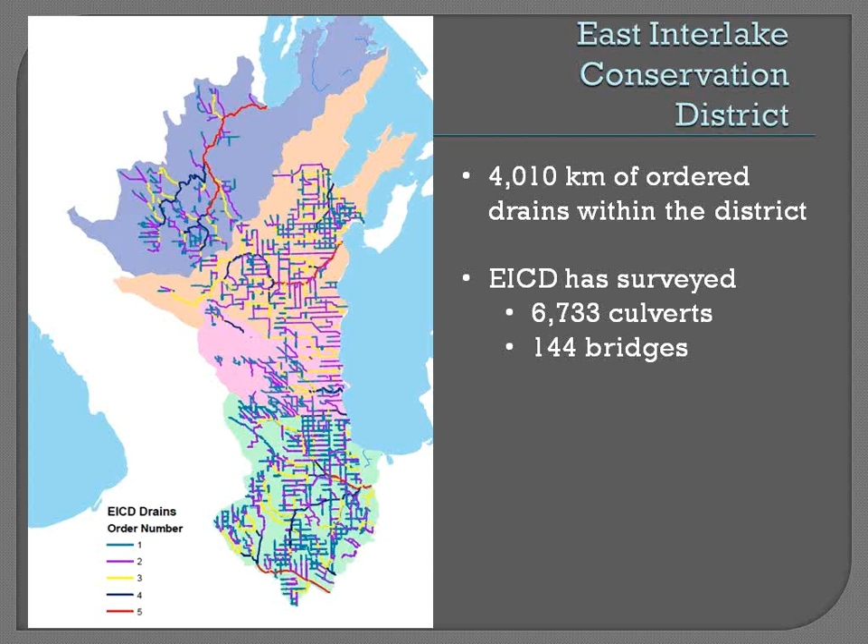...or other aspects that the integrated watershed management plan has designated. And then, luckily, in the East Interlake Conservation District, we have LiDAR for the Fisher River and Icelandic River watersheds. So hopefully it will become a little bit simpler for us - or will it? When we look at it, we could do something like a LiDAR-produced drain delineation.

So this is delineated drains within the watershed alone, and now it counts in all the drainage on private land, maybe some drains that aren't on the order 1 through 5 - that's 4,000 kilometers of drainage alone in one watershed. So what was the whole interlake is now just one little area.

So the question comes at the board level: what will this other layer of drainage mean to watershed management, right? So we have this layer - can we include it on a detailed map like this? Like, the drainage maps of tile drainage - can we include that in a map, something like this, so we know where they are at least?

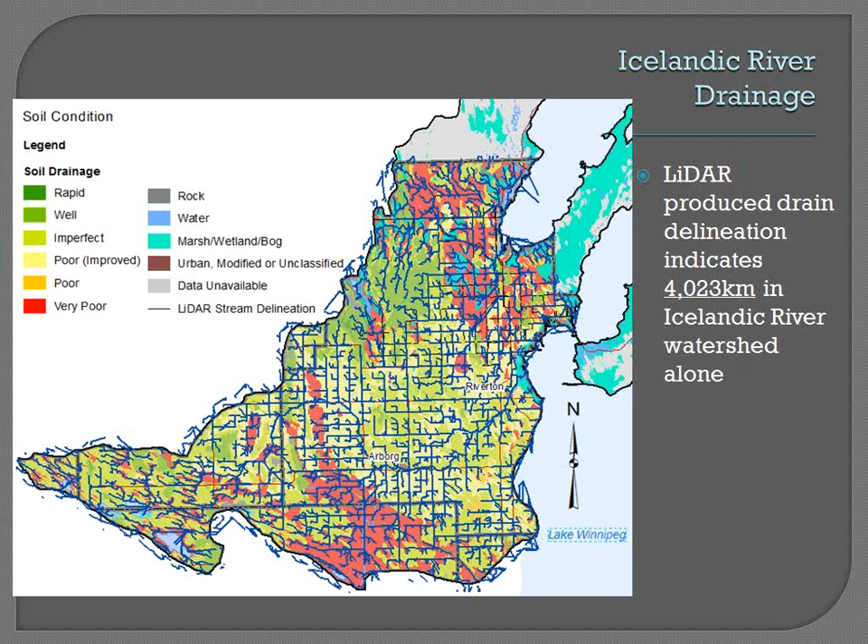Well, it may look like there's a lot of drainage, but when we run another process on the LiDAR data set, it indicates that about 12% of the Icelandic River watershed is not contributing on normal events - the rain fills up and doesn't find anywhere to go. So the yellow areas are the non-contributing catchment areas, and the blue areas are potential wetlands. The board indicates these are areas where we'd like to see just monitored drainage or reduced drainage, or just understand where it goes, relating to tile drainage especially.

It's amazing what the LiDAR can do for you. As a conservation district, you're able to show that 12% of that area is not contributing. If you had to send out your surveyors and do all that work, it would have taken a long time. Yeah, it saves a lot of time, especially on...

If an individual landowner comes to us and asks about conservation programming, we can know and do a lot on the tabletop now, and decide if that project would be feasible - whether it's a wetland retention or other habitat easement areas. So it's the first thing we go to now, the LiDAR data set. Probably one of the most important tools in the toolbox for a conservation district. It definitely is.

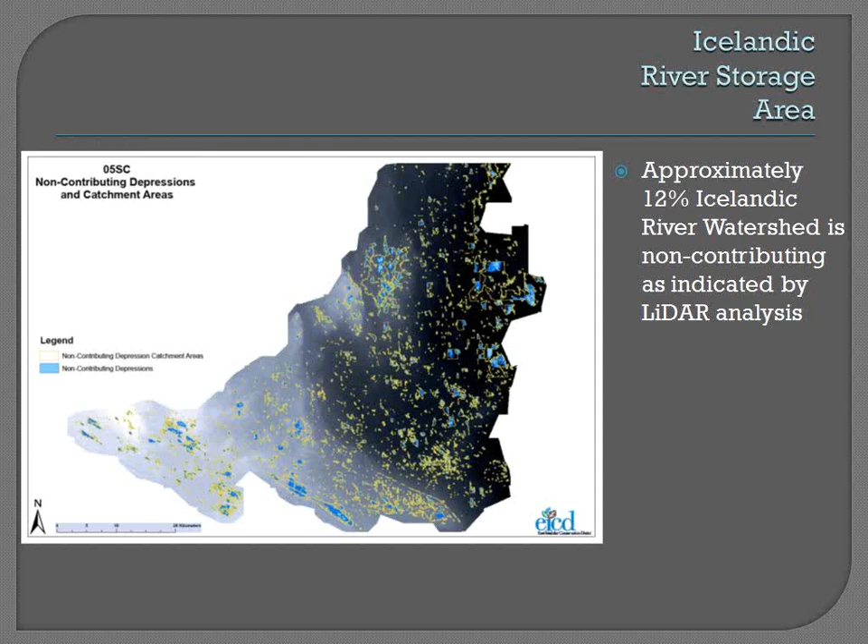So in the EICD, one of the first questions 10 years ago was, what is our water quality like? So we initiated 9 different sampling stations within the East Interlake Conservation District, and we've been monitoring them 4 times a year. This is a general water quality index for the 9 waterways based on 22 different parameters. We took the liberty of putting the ones with the best general water quality indices on the left.

Fish Lake, Willow Creek, Washow Bay - not too much anthropological activity there. The headwaters are wetlands, and it goes through undulating creeks, maybe through some pasture area, and then empties into Lake Winnipeg. But on the right-hand side, you can see where there's a lot of anthropological activity: Grassmere, Parks, Icelandic. Those are the areas where there's the Centerport development, lots of urban areas like Parks and Grassmere. Icelandic River is more agricultural area with some urban areas. So you can see the general trends here.

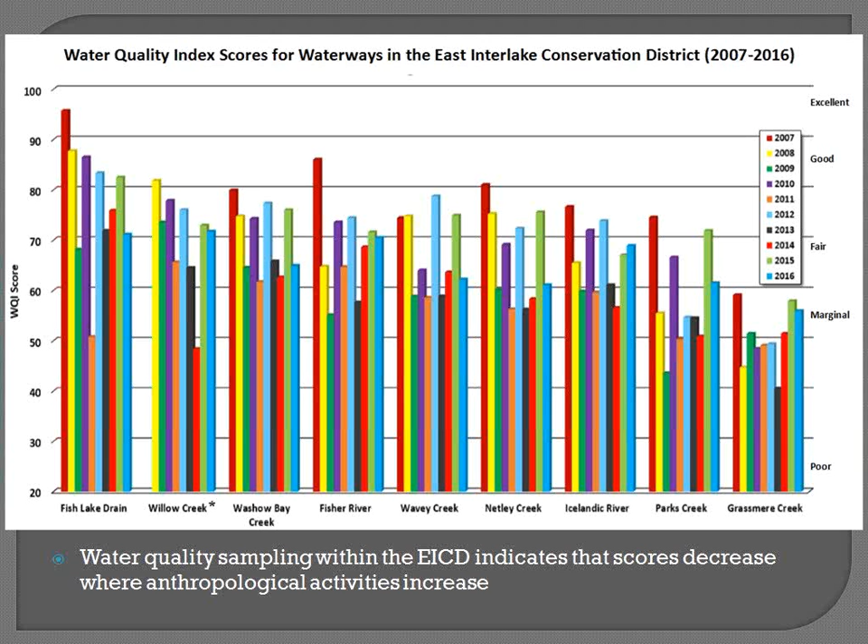I mentioned earlier that we've completed 4 integrated watershed management plans, but as you know, sustainability is a moving target, so every once in a while the sub-districts come back together and discuss other strategic topics that might not be within our integrated watershed management plan. The point here is that we thought about 6 different things at these meetings.

The number one question that the members of the Conservation District had was, how should EICD, municipalities, and planning districts - the reason the 3 is there is because a lot of our board members wear those 3 hats, so it's easy for them to bring those 3 organizations together - how should these areas stay abreast of tile drainage and any associated positive and negative effects? So number 1 was partnership, number 2 was partnership, number 3 was partnership.

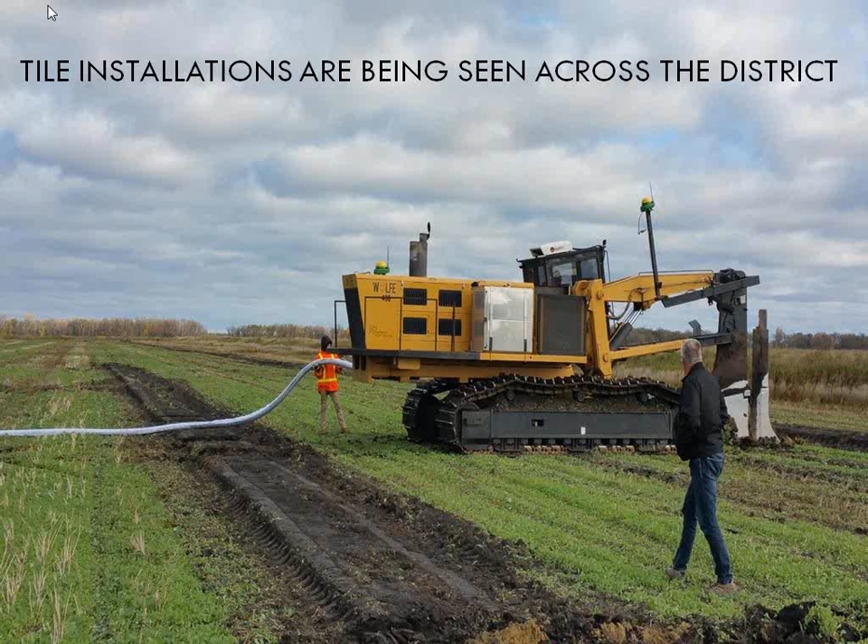So, there we go. Tile has been brought into our district over the last 10 years or so, and it's ever increasing. Projects vary in size from whole fields to just small areas. I'd say a lot of our projects are that 20 to 40 to 60 acres where there's a wet spot and the natural drainage and the soils aren't doing it. So the tiles are put in sort of selective areas.

So this picture, and the last one, is courtesy of MAMA - that's the mnemonic for the Manitoba Agricultural Water Management Association. That's a mouthful, but they're an organization that represents industry and has been very active at promoting this technology and showing people what it's all about. So the picture on the left is interesting, I think, because you see a lift station and an irrigation pipe. Obviously this is in potato country, a little bit sandier soils. Lift stations are required where the natural topography doesn't do the job, so that's probably the case in about half of the projects.

And the picture on the right, you can see a tile lift station outlet into a sort of private ditch, and then it's heading north and then towards a municipal ditch. And that kind of generates a question: should there be public investment in helping this technology work, or is this strictly a private venture? That's probably a question for another webinar. But in Ontario, you see a lot of their infrastructure is geared to basically tiling all agricultural areas.

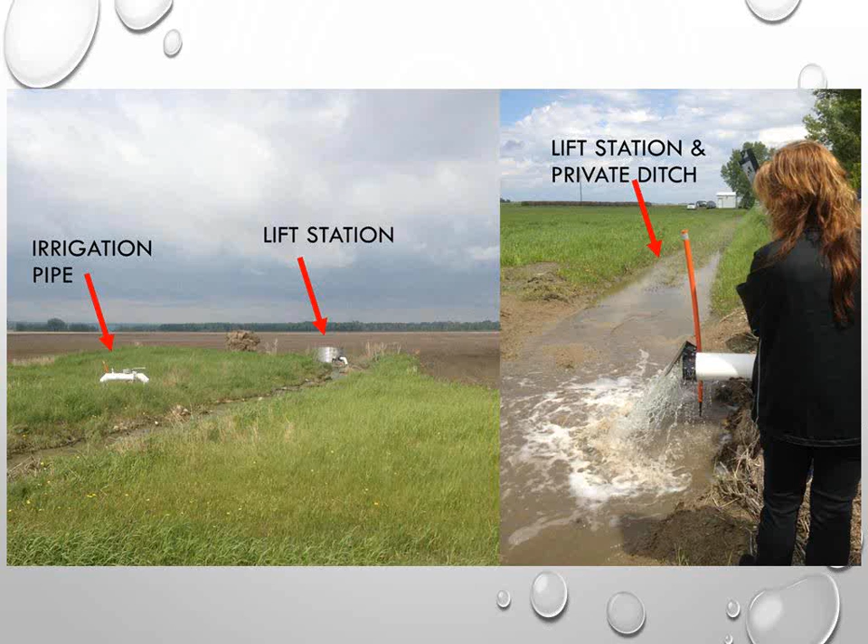Yes, and perhaps that's not surprising, Cliff, considering how tile is the dominant form of drainage in that region, whereas here, historically, it's been surface drainage that has enabled the farming to occur. Right, and I guess the change is just due to the increase in land prices and increasing need to get more value out of the land.

When tile is coming in, if you see a backhoe show up in your neighborhood, you get concerned, you ask questions, you wonder if they have a license. Same thing with tile. When a tile license comes forward, or you see the equipment out there, people are concerned. These are things I've heard from landowners and municipalities, and hopefully we're addressing them through these workshops. Let us know if these fears can be mitigated, if we have policy to deal with them. Are they valid concerns? Yes, I think they're all valid concerns, but something the technology can definitely address.

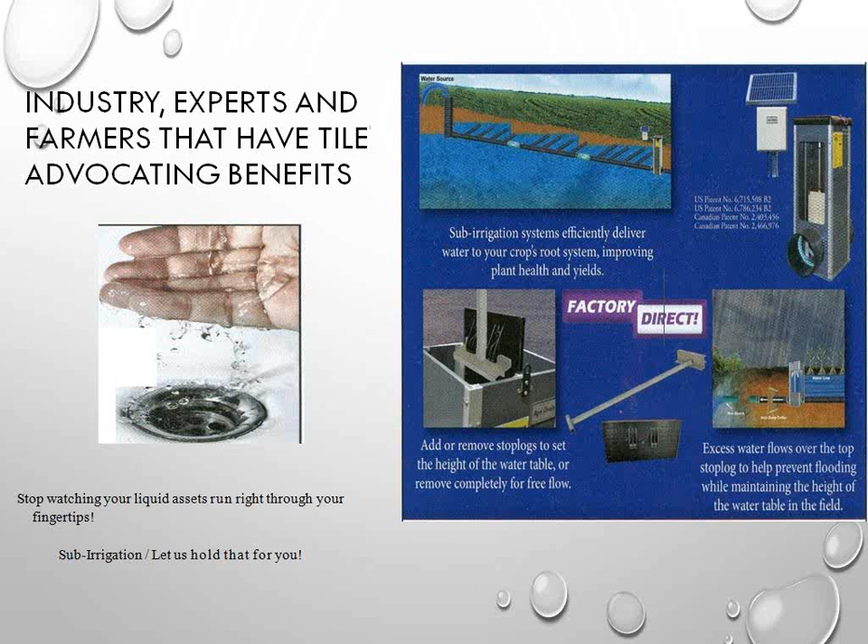On the plus side, we've done 3 webinars so far, this is the 4th one. There's been a lot of positive to talk about in terms of tile drainage, a lot of benefits. From a conservation district standpoint, we think of surface water management and utilizing water when you have it. It seems like a fantastic technology for that. Really being smart about water, and as long as the impacts can be mitigated, it's looking like a win-win. I heard two words there, benefits and management. Both go side by side when we're talking about tile drainage.

When you have a positive experience, you tell one person, like Steve had an incredible hamburger today at lunch, and he told me about it. But if you have a bad experience, you tell 10 people about it. That's not the point of this slide. This is basically a situation that happened that I think we could all learn from.

This particular project is probably about 5 years old or so. This was a problem where a tile was put in, and there was a lot of discussion ahead of time, but the outlet wasn't satisfactory because it ran all the time. It was just impossible to lower the water table in that area. The solution they came up with was to extend the outlet, so it fed into a natural creek, and that wasn't a problem after that.

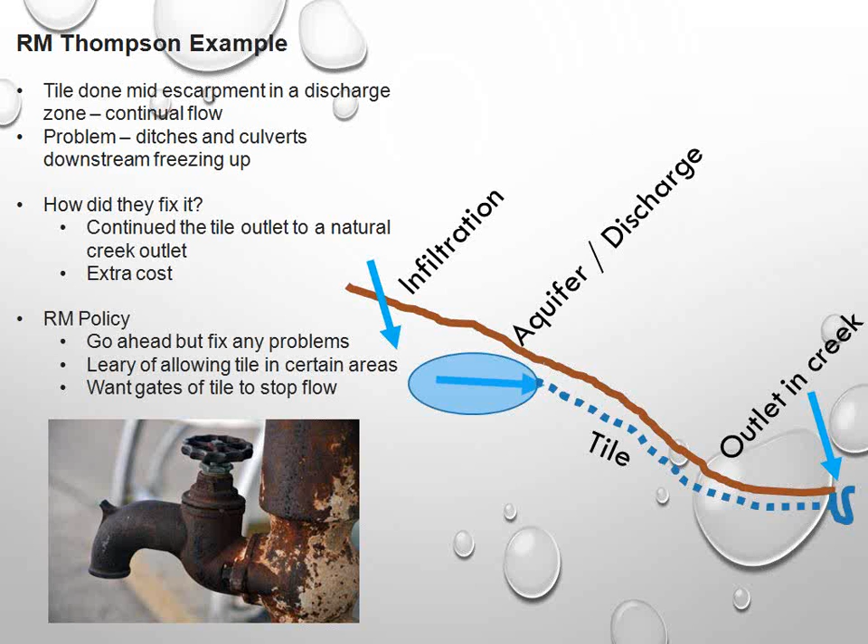Again, there was a negative experience that turned into a positive, and a lot of learning happened along the way. I think those experiences are what the webinar is all about, because we want to share them. I think at a workshop at Intermountain, there was the same kind of concern, where in these areas of seeps and springs, if they get tiled, what can result.

So this is a bit of advice, I guess, in terms of policy for conservation districts and municipalities. Just from our experience, I don't consider myself an expert, but I talked to Mitch and our engineer that we work with from time to time who worked on the first couple webinars, Bruce Schufeld and others.

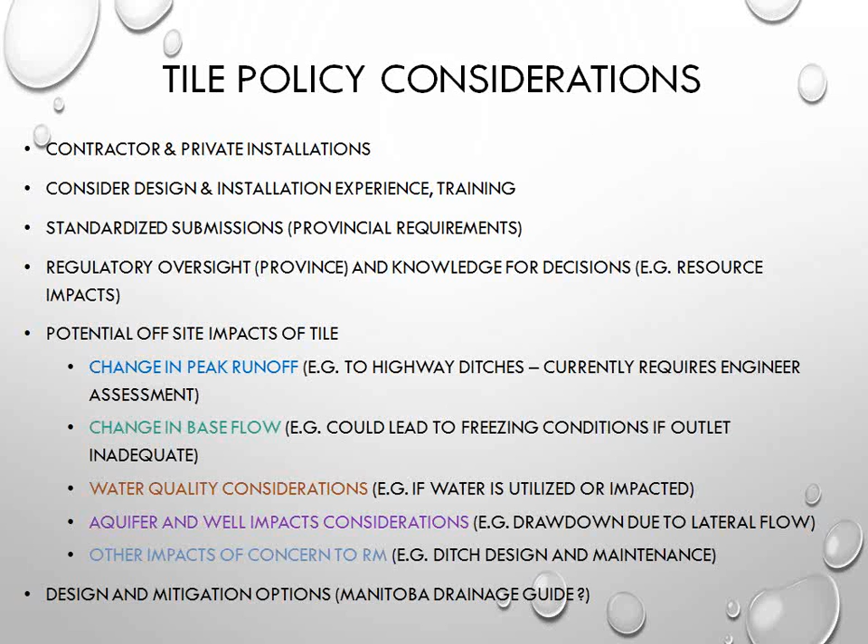That's something that both Bruce and Mitch talked about in terms of, okay, the phosphorus is great, nitrogen is a little elevated, how can we mitigate that? The salts, the same thing. There are ways to deal with that through design. And the RM Thompson example, it would have been nice to do that up front rather than after the fact, but either way, we learned how to do it through those things.

There is a fair bit of information out there. If you want more information, you need more education, and this series of webinars, thanks to the Red River Basin Commission and partners, is a great way to start. There are other things as well, other avenues.

There have been workshops held where you have face-to-face with the presenters. There are some reports available, and I think both Jeanette and Mitch have gone to training outside of the province in tile drainage and what's happening in other jurisdictions. Tile drainage research, we always look to other parties for that, and there is significant research going on in the northern states, but also at the University of Manitoba.

Mitch alluded to that in his presentation in the third webinar about Manitoba research, and I think we're going to get more of that to come. So that's interesting, and I mentioned this in my previous slide.

Currently, we use the Ontario Guide for Drainage, which gives us something to go by in terms of guidelines and design information. It would be nice to have a Manitoba version because we are different than Ontario. We don't have the same deep freeze, or rather we have more of a deep freeze than they do. We have more of a salinity problem, and we have things like the escarpment and the interlake that we need to account for.

So mapping is a good way to start. I think when municipalities do things, they like to look at maps and maybe GIS layers. These things are available, but I don't think there's such a thing as a tile risk map. So this is new mapping that's probably required. Some municipalities, I think, are working towards that with either government or private consultants, but I think that's probably a good first place to start.

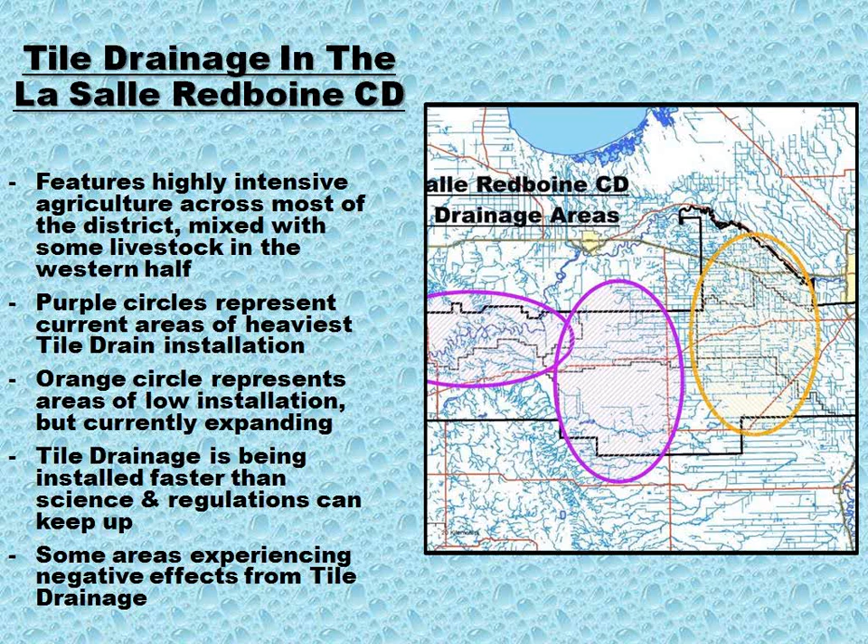As the case was described by Cliff, there have been some concerns raised and some cases of concerning situations, and so they obviously require treatment site-specifically in order to address them.

Groundwater and hydrology and hydrogeology are also of interest, and hydrogeology is becoming an aspect of emerging importance in this topic, and that's a soils guy who's saying that, who's normally focused on the top meter and change. Of course, we have to look beyond that, especially if we're going to assess the appropriateness of BMPs to mitigate tile drainage concerns.

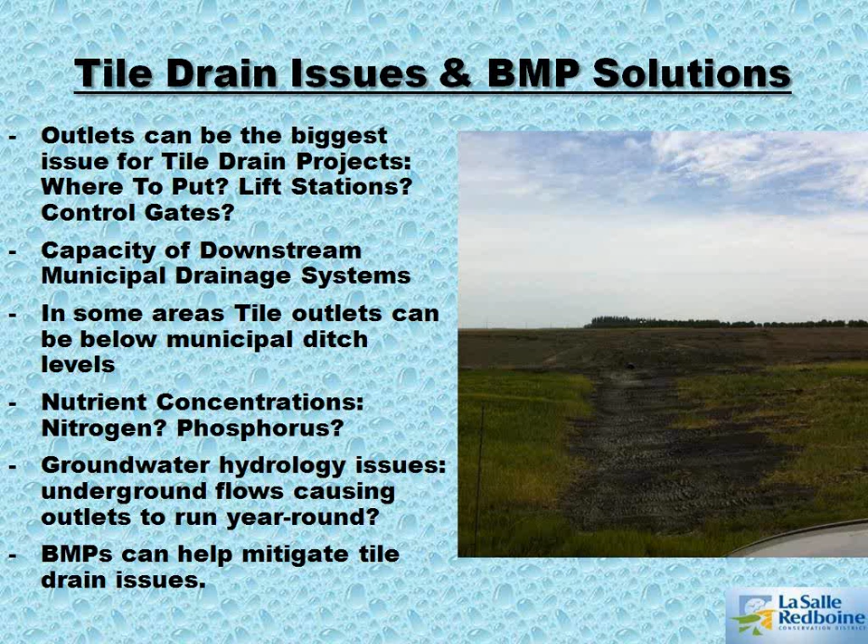So what I think is important there is that we realize each one of these cases has to be looked upon as an individual case, and a decision has to be reviewed and looked at. I think that's the way we'll be able to create success in the partnerships we're seeking, because it has to be good for everybody.

Precisely. And so, as I mentioned, this was addressed by yours truly last week, and we shall allude to it again, giving full acknowledgement to the La Salle Redboine CD's role in the Classen project. As I probably described it last week, it's located off Highway number 2 near Culross in a clay soil where the tile water does flow.

And the interesting aspect to this tile project, the innovative aspect, was what the CD supported, and that was the inclusion of a water retention component.

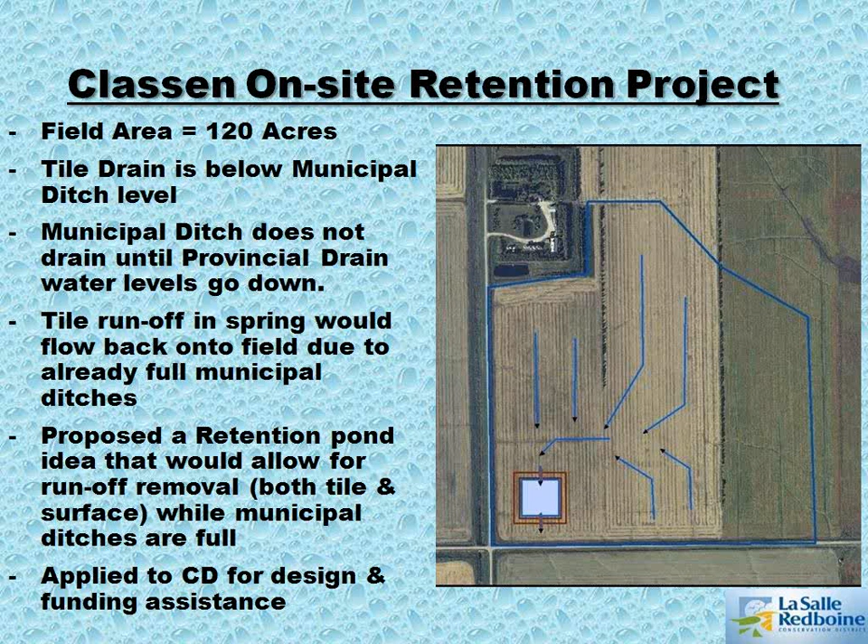And that's what Justin is describing here first on the map, and now with a jazzy overhead view, which I didn't previously have access to. He's got the toys to do that. Oh yes, wow, we got to go and borrow that. It's pretty clear, wow, I need to negotiate with Justin for use of this photo in my presentation.

So as I described briefly last week, the tile water is first sent into a small collection pond and then pumped as needed up to the main reservoir. And as you can see from the overhead view, there is the local drainage network and an indication as to how the water level in the main reservoir can be managed.

I think what's important to look at here is that an application was sought by the farmer, and when it was reviewed, a resolution was found, and the win-win is for all sides.

Mm-hmm, that's right. And as I described last week, yes, the farmer's excess moisture problem was addressed by the tile, and due to the limitations of the local drainage network, the farmer was motivated to pursue an innovative approach that may actually also offer some environmental benefits as well, water retention being an emerging topic of discussion in the province.

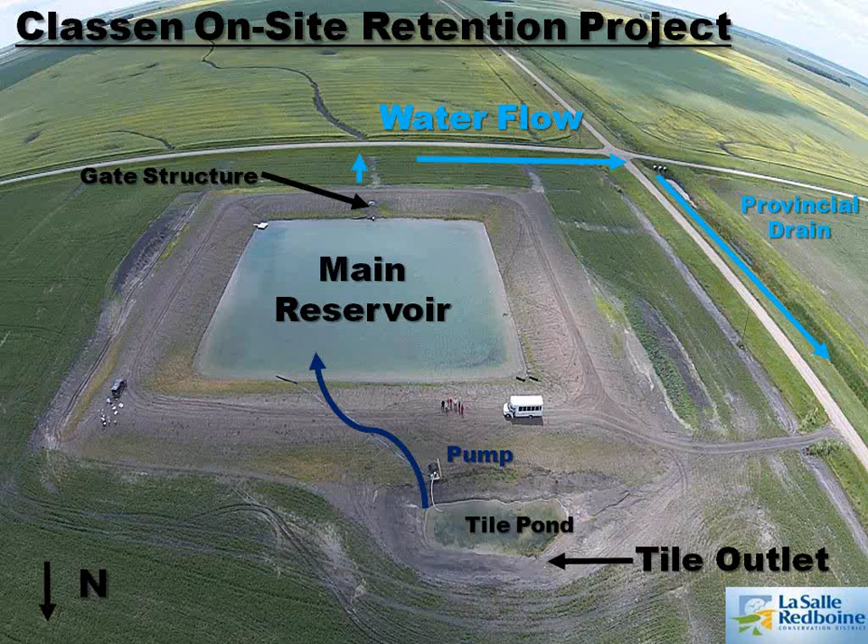And so Justin's provided some details here. I won't go over them line by line, just know that he'll be glad to elaborate on the project, and he does acknowledge what I described last week, and that is the University of Manitoba's involvement in collaboration with the U of Waterloo in terms of water flow and water quality implications, surface versus subsurface flow.

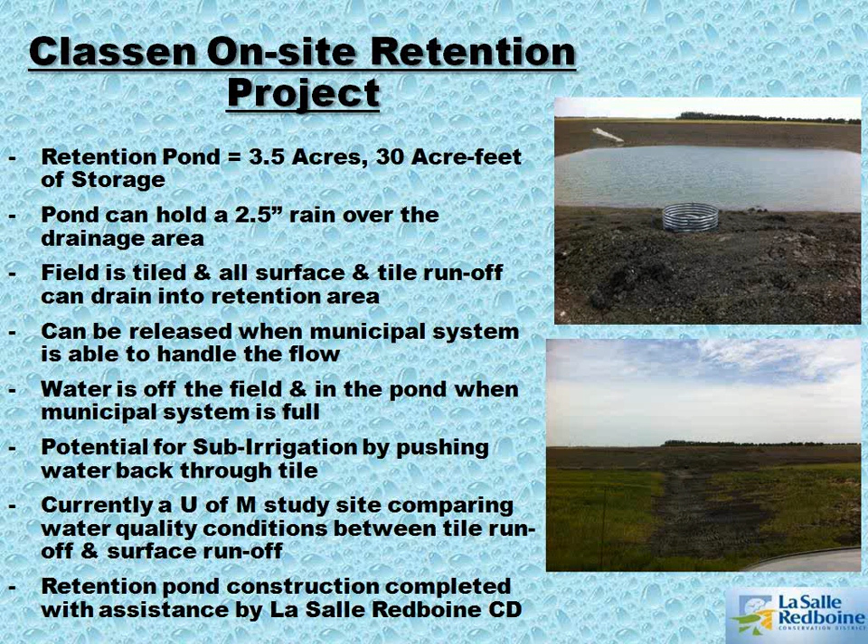To emphasize the innovative aspect of this, the real appeal was that water retention became part of the mix, and the landowner's interest and motivation takes it out of the ordinary kind of thinking. This is where the theme of partnership comes into play - the role of the CD, the landowner, and now researchers and government funding through Environment Canada and provincial funding through Growing Forward to make it all possible.

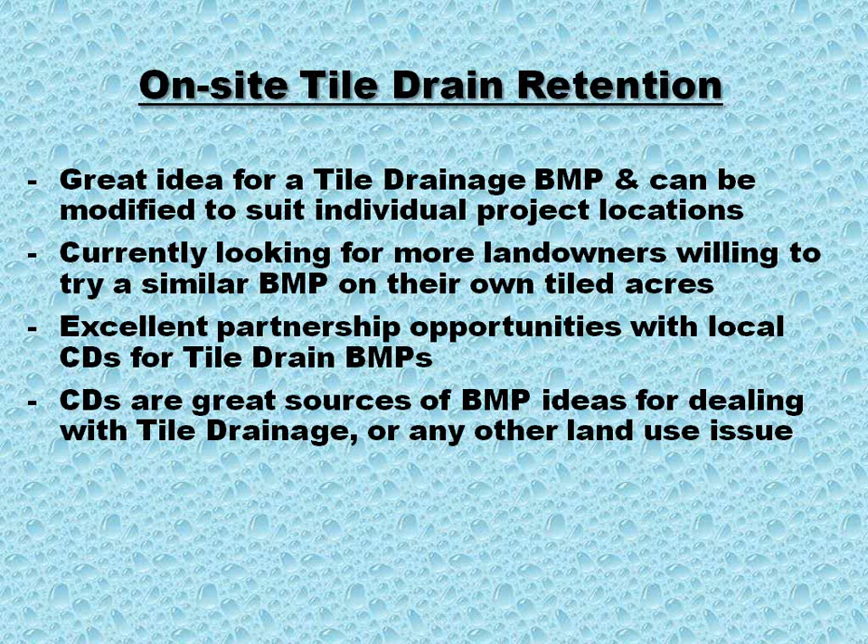That leads us to poll question 3. Name the conservation district that supported the addition of an on-farm water retention component to a tile drainage system installed near Culross. The options are Eastern Interlake, La Salle Redboine, Pembina Valley, Cooks Creek, and Seine Rat River. This question is kind of putting you to the test to see if you're paying attention.

We see that Jackie has opened the poll, hopefully you guys are all there pushing your buttons, soon to give us an answer. So I think so far it's been good.

We've got three perspectives from three different conservation districts, all starting to deal with it. It's important that listeners see what's going on in the basin, and this isn't just about the basin - it can be reflected in the Assiniboine River or any other part of Manitoba or the country. Later on we're going to hear from the Roseau River Watershed District and get a U.S. example. So what are we looking at, how is it being dealt with, and what are the solutions to create that partnership? That's what it's all about.

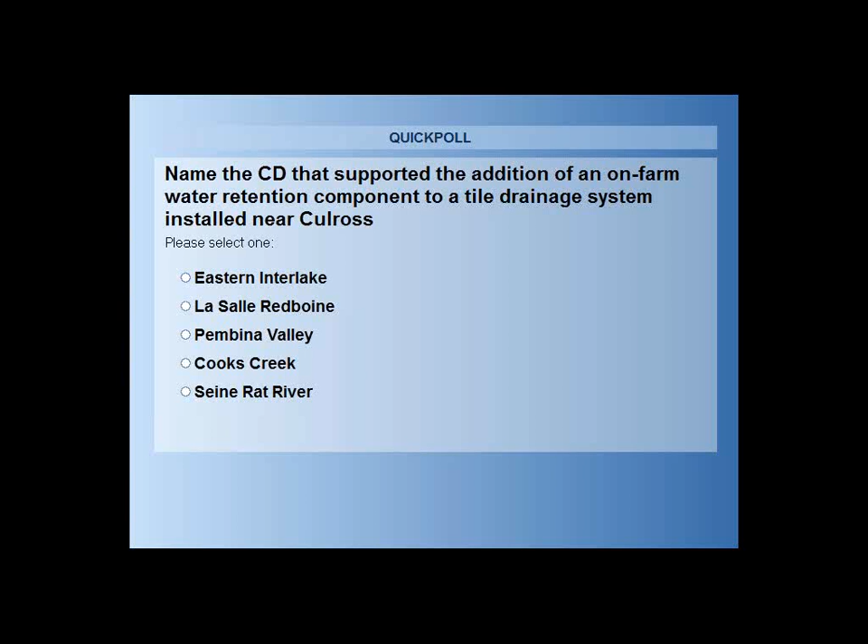How are we doing, Jackie? We're at 66%, I think we're good. We'll keep on going if we could. All right.

So here are the results. Drum roll. 90% said La Salle Redboine. Oh gosh, thank you, that's excellent performance. We love you guys. Woohoo! All right.

Okay, so we're going to keep on going. We can now move on to that special perspective I was alluding to earlier, coming from George Gray, Reeve of the RM of Dufferin. The floor is yours, George.

Thank you very much for inviting me today, and welcome to Webinar Land. It's a very distinct pleasure to be in the webinar series. Each segment I'm going to present today has focused on a specific part of tile drainage and how it affects all parties involved. The last segment is no different - it identifies the cumulative total of all four segments, it's just a roll-up of all of them.

What we will be doing today is focusing on policy and local government considerations. I will attempt to portray our perspective on tile drainage - when I say we, I mean the RM of Dufferin. We formulated a policy a number of years ago. The Reeve at the time, Sean McCutcheon, felt because of Dufferin's location and high interest in tile and benefits to producers, we as well as the province needed a tile policy, because at that time it was sadly lacking in all areas. Very few RMs had a policy, which we didn't either. We were embarking on a journey of tile drainage, and we sort of knew where we were going, but we knew we had to have some sort of a policy.

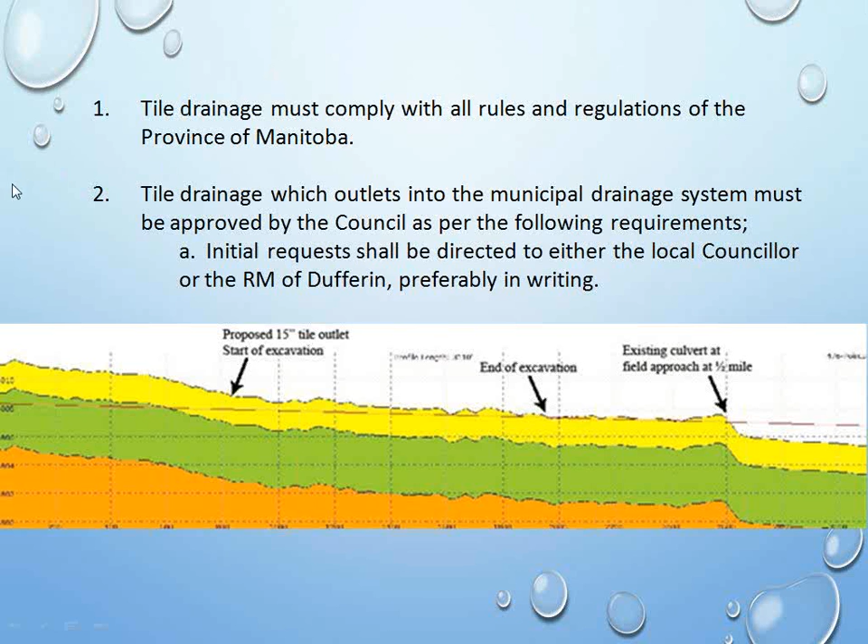I'll read part of it. The council shall require copies of tile drainage licensing to be completed prior to commencement of the installation of tile drainage. Absolutely imperative to the success of tile, everybody has to know what's going on. We do not allow plans to be in after June 1st, though we're a little bit flexible on that, not much. The final date for ratification is August 1st of the same year, before they will be allowed to tile.

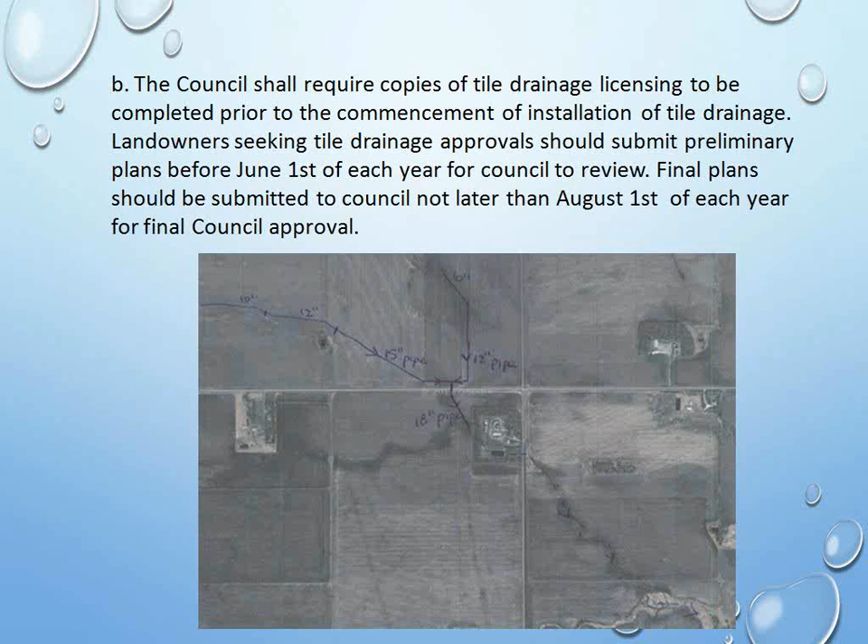Anything after that we will grant, but it has to be under special circumstances. The application shall be dated, shall have the designer's name and contact information, and shall have the installer's name and contact information. Everybody has to sign off on it.

We review it. Our foreman, our councilor, possibly myself, and the tiler and owner in some cases will go do an on-site inspection and make sure all the facets of the application are correct. In the diagram to the side, you can see where the tile has been installed, outlets, and everything. A very graphic model.

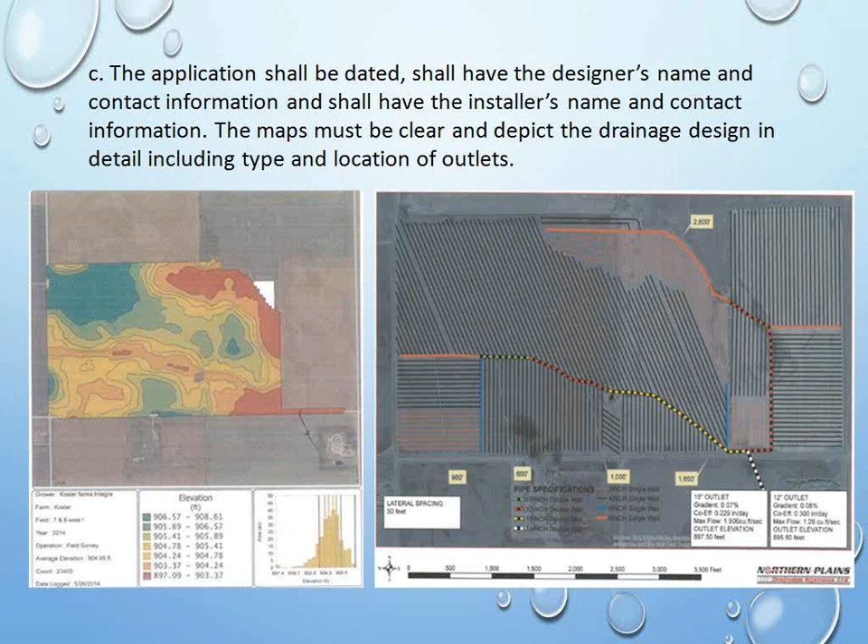The drainage coefficient of tile shall not exceed a quarter of an inch in our estimation. I know the province says three-eighths is the level, but we've had issues, so we lowered it to a quarter. We will not allow perforated drains under any circumstances, unless it's on a high ridge somewhere where we know full well there aren't going to be any implications.

So that was main drains you were referring to that are not allowed to be perforated? Correct, the main drains are not allowed to be perforated. Understood.

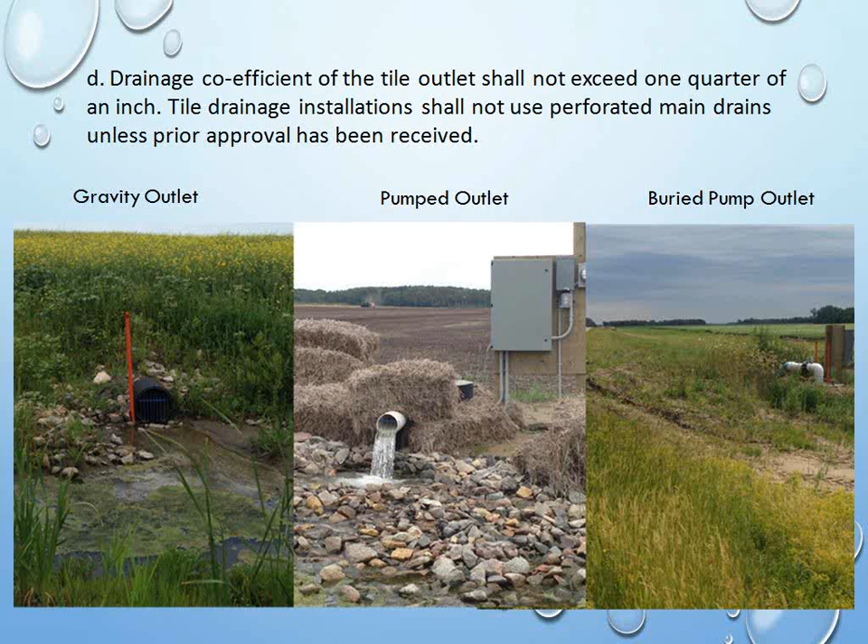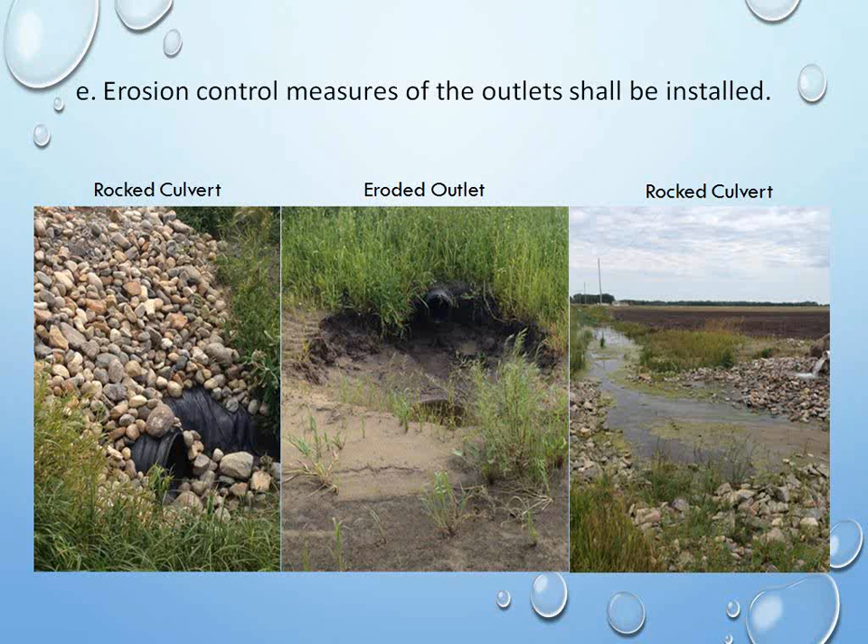Here's a typical example of erosion when things are not done properly. On both sides you've got rock culverts, and that's imperative to the success of the operation.

The license holder of the tile drainage may be responsible—we have changed that to must be responsible—for mowing and maintenance of ditches downstream of all tile outlets. They are very good, we have great tilers in our area and they do their best to mow. With the cattails, as you can see in the left slide, cattails are becoming a real issue, but mowing is absolutely imperative that it be done.

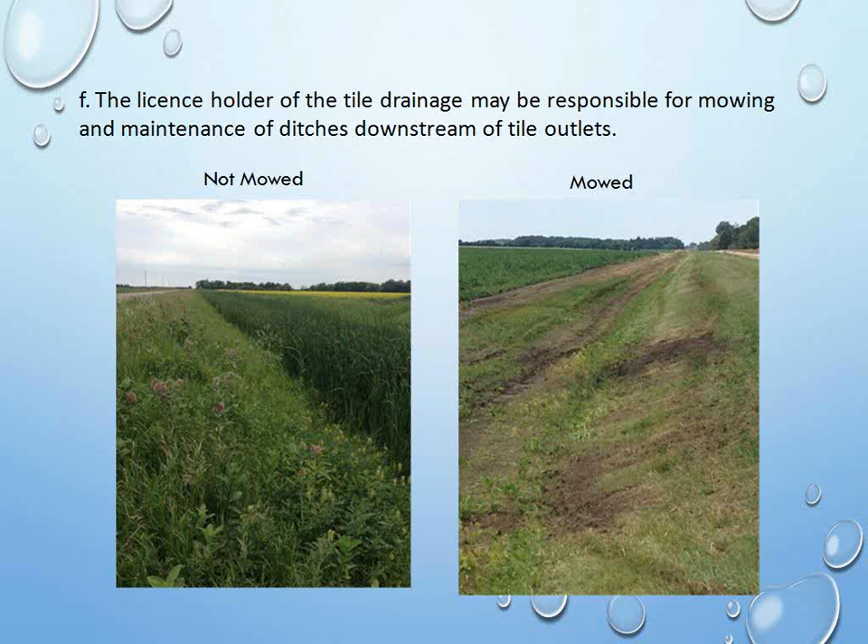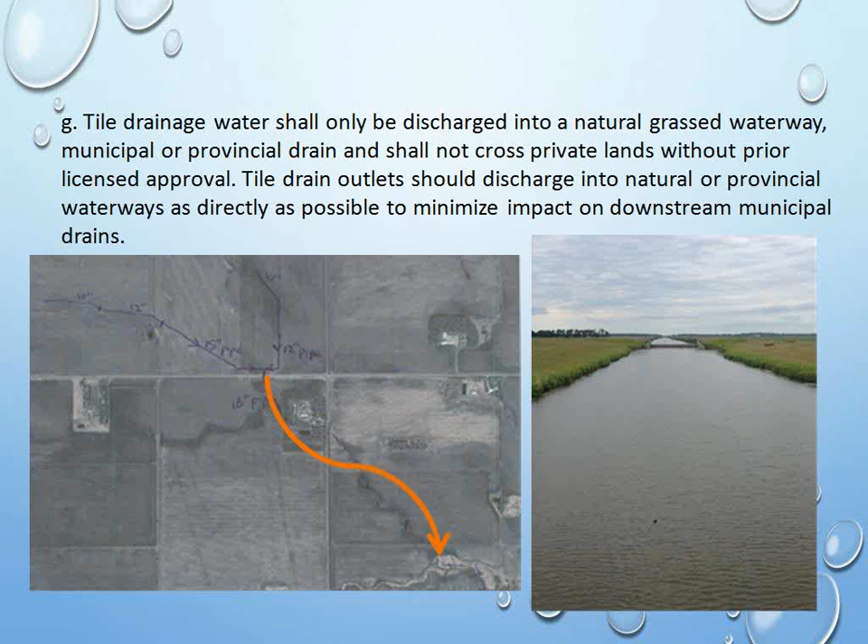We like to direct our tile water into a main waterway, whether it be a main ditch or a river or whatever, as quickly as we can. One of my examples later on, I'll itemize it and show you how successful that can be.

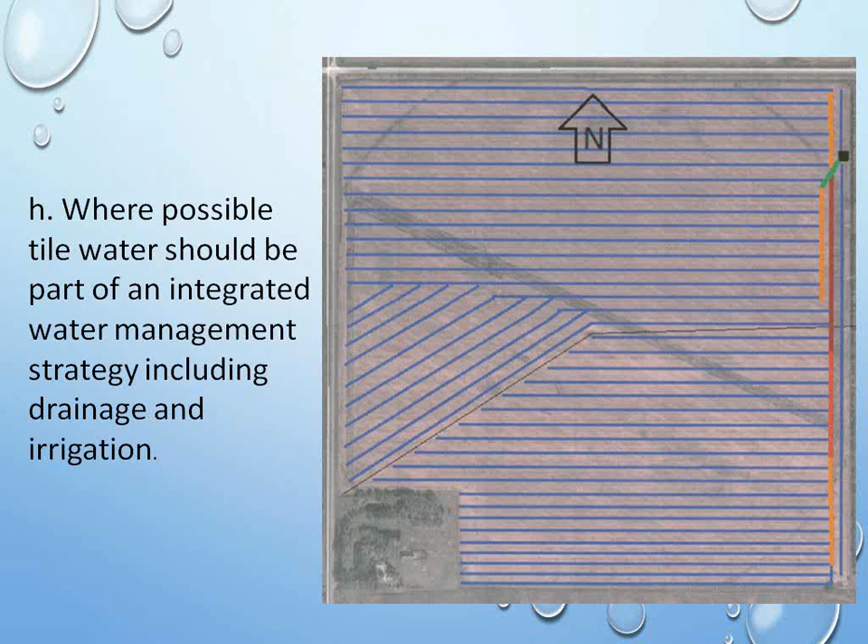Where possible, tile water should be part of an integrated water management strategy, including drainage and irrigation. A very graphic model of how a portion of land can be tiled—it's almost pretty, the way it's been done.

A tile drainage project requiring modification to existing municipal drains shall be the sole responsibility of the applicant and shall comply with the private drainage works policy. We've had a private drainage works policy in place for a number of years now, which allows the farmer to apply to us. He signs a document and is allowed to do all the changes of the specific area under his responsibility; he has to pay for it. We oversee it, our foreman looks after it, and it also frees up the RM of Dufferin—we're responsible for it, but it doesn't cost us anything, and it allows the farmer to get it done more expediently, more quickly.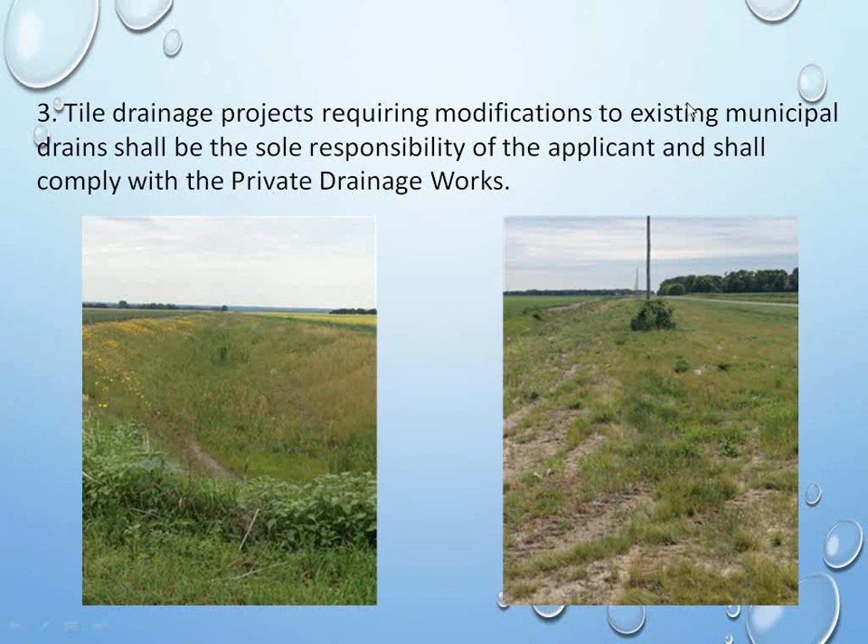What I liked about your comment, George, is that you said earlier you had some great tilers, and based on the fact that the RM has come together to build the bylaw, it's been that cooperation and partnership that's created this, right? Oh, very much so. It's just a great experience. Tile's a real success story, but it's only a success story through the cooperation of all the three components and the province as well, and all the people involved in it.

There are some ramifications for failure, some penalties. Failure to comply with the above rules and regulations regarding surface or tile drainage shall be subject to the RM of Dufferin Drainage Enforcement Bylaw, and all fines, penalties and sanctions as may be applied by the province of Manitoba. There are some things that we frown upon if it's not done properly.

Okay, well, that's fine. Thank you very much for hitting that, George. That will be our segue. I think what we've heard here is that Dufferin has experienced a lot of tile drainage, and with that experience, they've had to work alongside their suppliers and make things good for everybody. So we really want to thank you for that presentation. It was really good. And you have more? Yep. Okay. Once you get a guy like George going, no, that's fine. It's too good. Okay, there is some. Yeah, he wants to.

Just some two examples of what we did. As I mentioned, the producer benefits are sizable. However, management of the water that enters the RM grid has its issues. In some cases, during a large rain event, the tile water and surface water become opponents in a rush to get to the RM drainage system. We currently have, in one particular instance, 4 miles of ditching with tile water as well as surface water entering a ditch, and the timing of the rain is a perfect storm as they vie for the ditch. As a result, flooding, backup, etc. occurs. In that area, all tile exits are gravity with no way to control the flow.

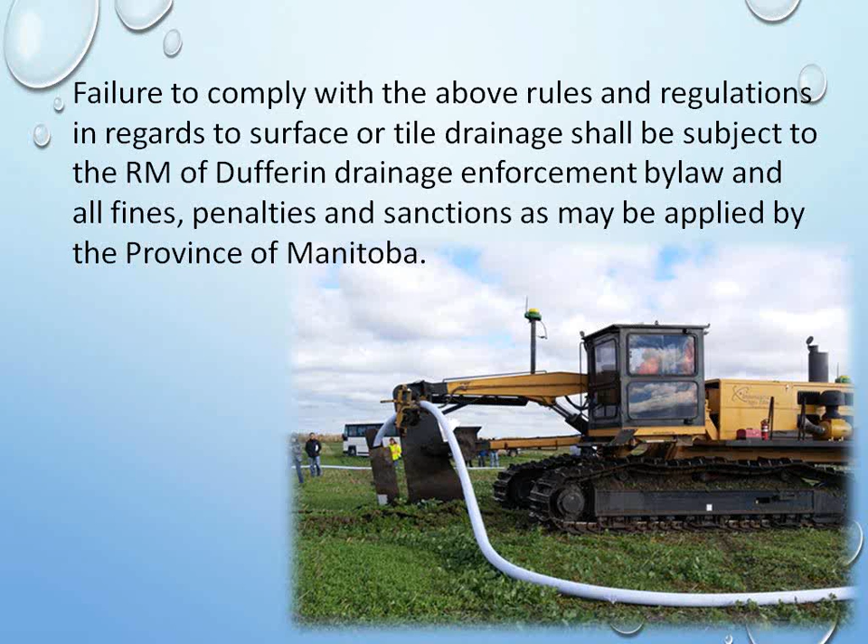And if anybody's interested, you're more than welcome to call us and get copies of our tile drainage policy. Thank you very much, George. I think it's really great that Dufferin will take the time and share that with everybody. You know, it is the factor of us working together to create that.

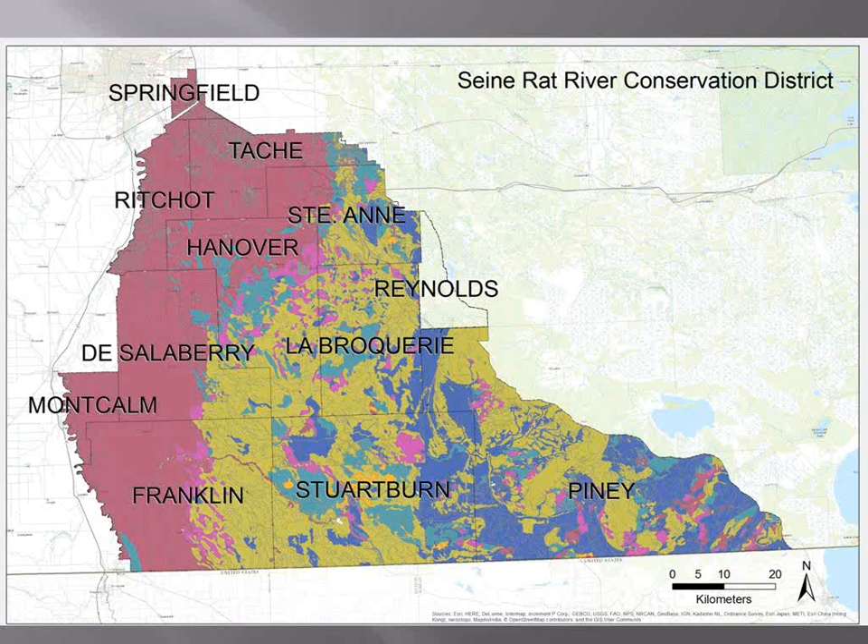And unknown. So some of the questions that we've had is that landowners are just a little unsure on what tile drainage is going to do to the landscape.

So here we have a peatland area from Holme Post in East Midlands, Great Britain, and if you believe it or not, the landowner is looking up at what seems to be a lamp post, but it's actually a post that was driven into the ground back in 1851, and now the land has dropped since it's been drained 4.2 meters. That's amazing.

It's pretty unreal, kind of looks like Narnia. So when we talk about that, what are the impacts of that? Well, definitely there's a collapse of soil structure, erosion, loss of all water retention ability, and it's kind of a showcase of the difference between draining a prairie pothole area and a wetland network.

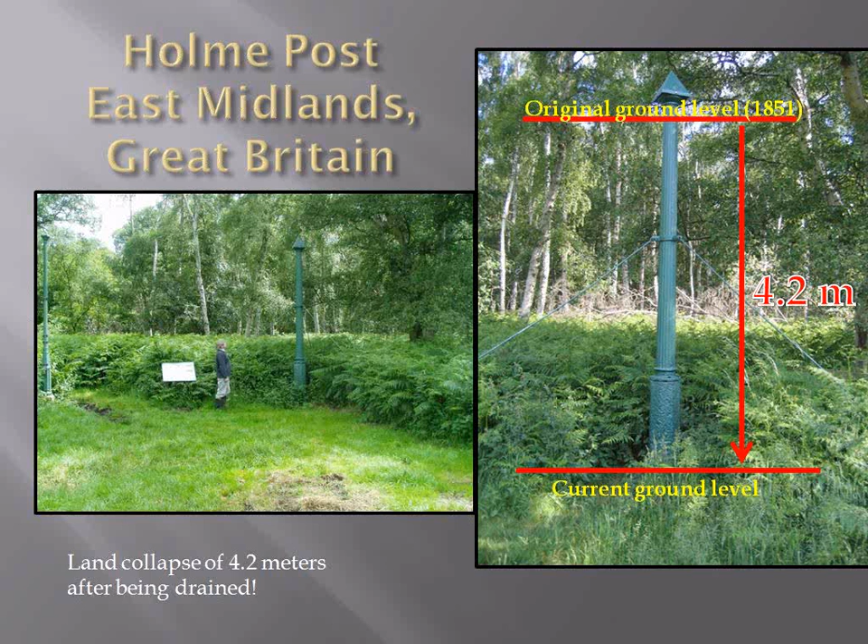Prairie potholes are a bit more segregated, almost an individual system, whereas our wetland networks, we're finding there's sections upon sections that are large, interconnected water flows coming in. So if you're tiling around one wetland in a quarter section, you could still be potentially impacting that wetland. And I think that's just an unknown for us right now, and it needs to be further clarified. Great example of that.

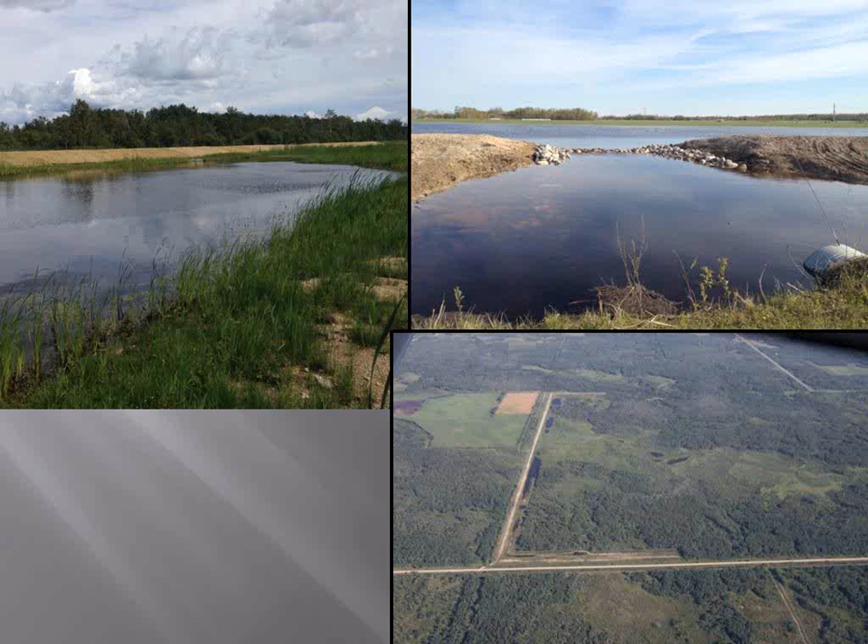So the Conservation District really looks at surface and subsurface flows. They're really interconnected. So we kind of wonder what would happen if we did a lot more water retention in the areas that farmers are actually concerned about tiling, or they think tiling would be a benefit, and we know tiling would be a benefit to the agricultural landscape.

And the question comes up, well, is there an opportunity for community landowners to get together and put in some money, maybe matched by the Conservation District, to develop a larger scale local water retention project that would benefit a dozen landowners? Is that something valuable to look into? And moreover, is surface water management a place for it to be part of a tile drainage policy? We definitely think there is.

Definitely improving the water quality as well through the ecological functions of wetlands is also something that happens with water retention. And if that's something we're concerned with, as Mitch was talking about with the LaSalle Redboine, putting water retention in with the tiling, there's definitely a good fit on a small scale, but also on a large scale.

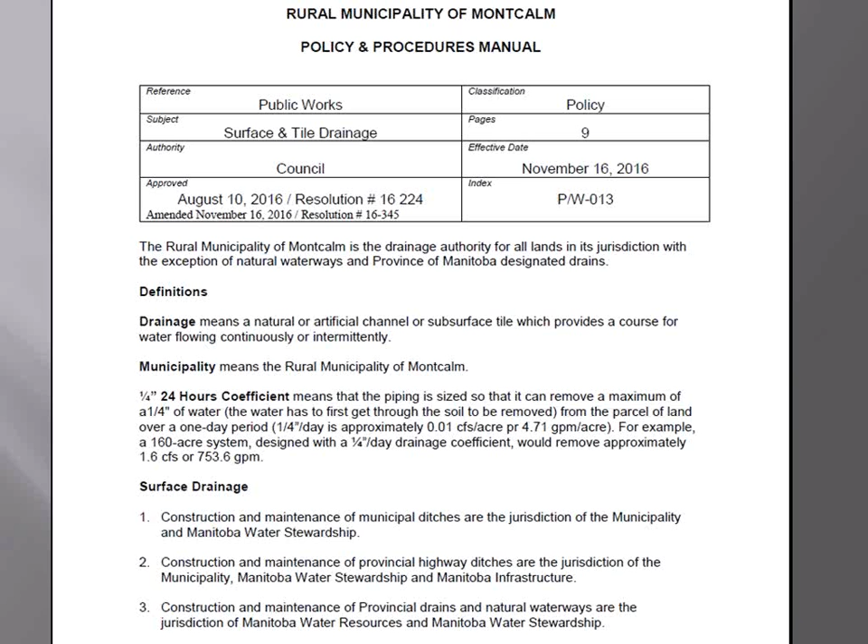RMOfMontcalm.com - they've also put together a fairly in-depth policy on surface and tile drainage. That's come up because they've got a lot of tile requests in their area.

The next map shows the eastern portion of Montcalm in the top right corner, which is part of the Seine Rat River Conservation District. The bottom left is actually not in a conservation district at the moment - there is none in that corner. But you can see they straddle the Red River, so they're right in the Red River Valley with a lot of clay and fine loam. Basically their soil types are pretty low risk for tiling.

The one thing they put into their policy is making sure there are restrictions put on the tiling, similar to what the RM of Dufferin has presented. There's really been a lot of questions around tiling, but I think this is great discussion to have.

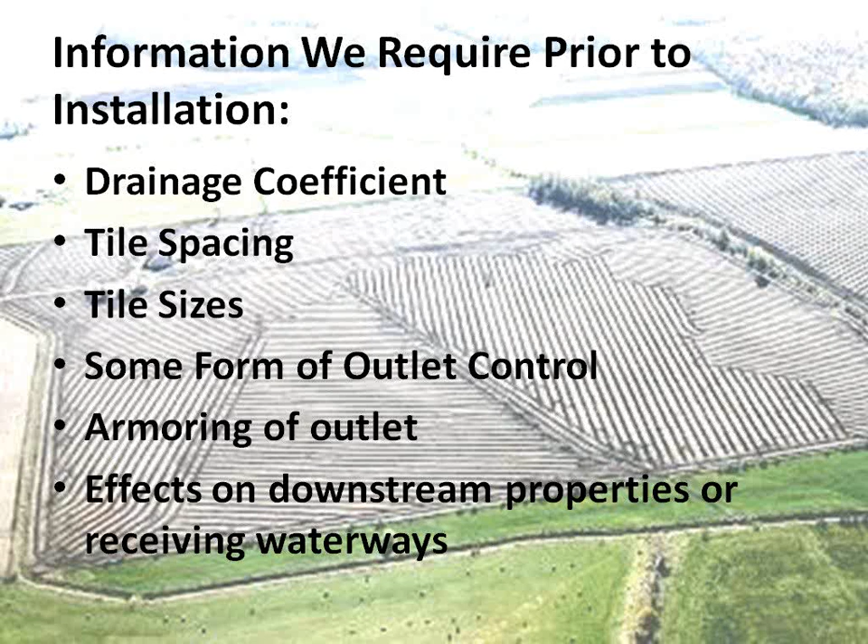So we took BWSR's suggestions, looked at information provided from the University of Minnesota and other organizations that had done research on the issue, and decided to set up some stakeholder meetings. We noticed producers in the area that had either installed tile or were interested. We got one of the local designers and installers out, and a couple agency personnel as well as some of our board of managers. We had a series of meetings and discussed issues as far as tile drainage - concerns that landowners had, concerns that installers had regarding requirements for design, requirements for installation, how in-depth the licensing would be - and we came up with a policy based on the discussion with the board and the stakeholder meeting.

So we reviewed the policy, and eventually the watershed adopted it and elected permit authority. On Minnesota's side, there is no standard requiring watershed districts, conservation districts, or water management boards to enforce this - you can elect to or just let it go unpermitted. There is no set standard at this date and time. It has been discussed in the past, but nothing has come through as of yet. So your next slide.

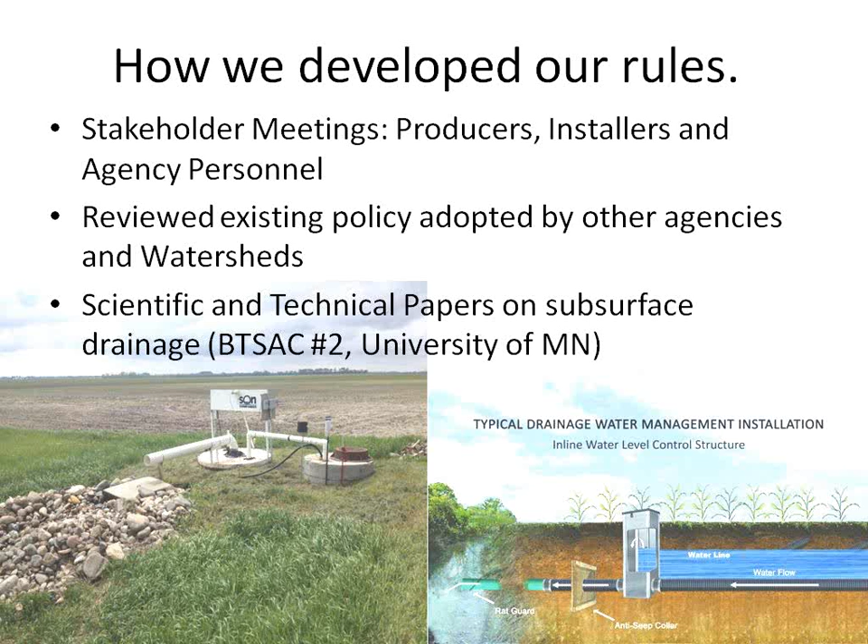So we have a layer, and each one of the tile lines has the attributes of the tile size. We have the outlet locations, the mains, pretty much any information we could find pertinent. That way it's a good general base information layer, but we also have the opportunity, if there's future modeling efforts or issues that come up, this information on file that we can draw from at a moment's notice.

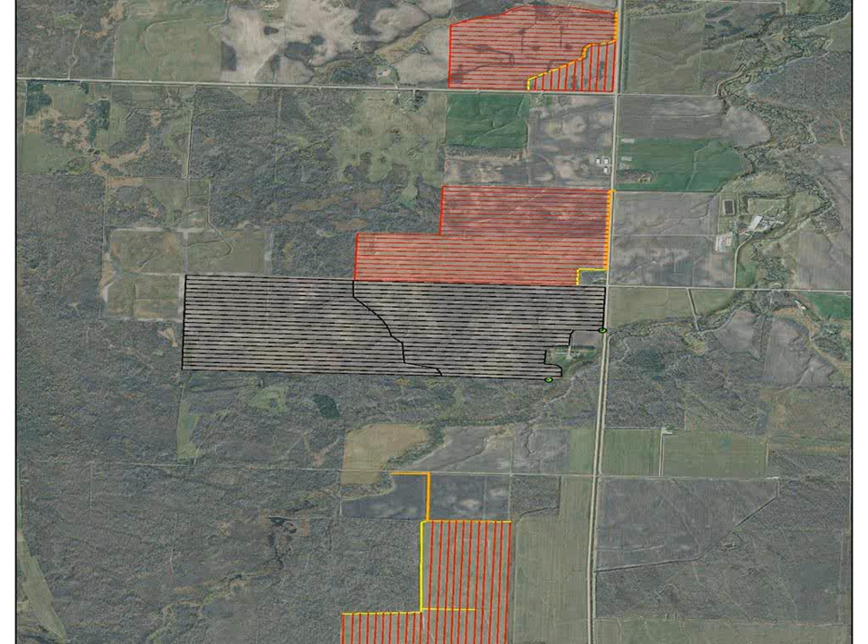So essentially what we came up with was a lot of the stuff I mentioned before. We set some limits to land sizes, what we would require to have drain tile on. We set the limit at 20 acres because we knew there were properties, farmyards, bin sites that were 10, 15 acres where they were looking at putting tile under the gravel just to keep their base dry on their drives. We felt that wouldn't fall into the same policy as drain tile for agricultural practices, so we had to disseminate that out.

We also put in criteria about flood events, and some language to basically state that if there was an issue, we still reserve the right to have that tile shut down. So if there were issues with damages downstream, culverts freezing up, or creeks overtopping and freezing on the roadways causing hazards, we had that flexibility to ensure the landowner ceases what they're doing for the greater good of the community.

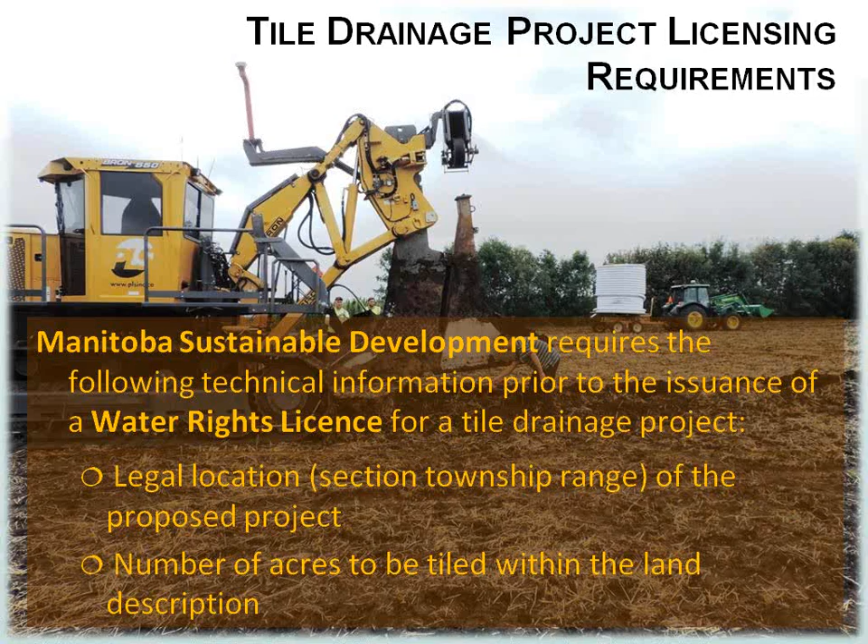Part of having a completed application, it includes the legal land description, the number of tiles or number of acres to be tiled. This would include the location, size, and flow direction of the lateral pipes, including their depth, pipe gradient, and details about the connection between the lateral and header pipe. The header pipe would include the location, size, depth, and outlet location, as well as flow direction.

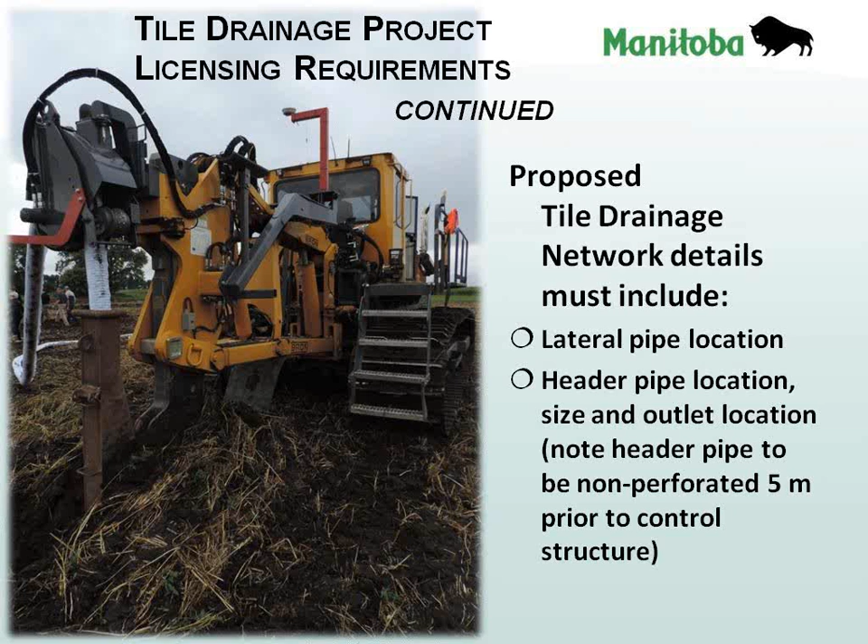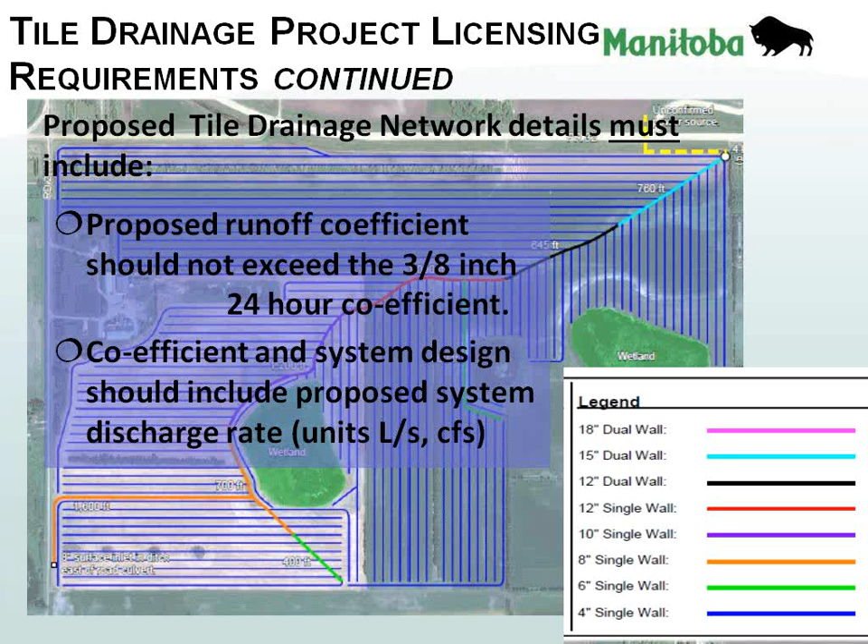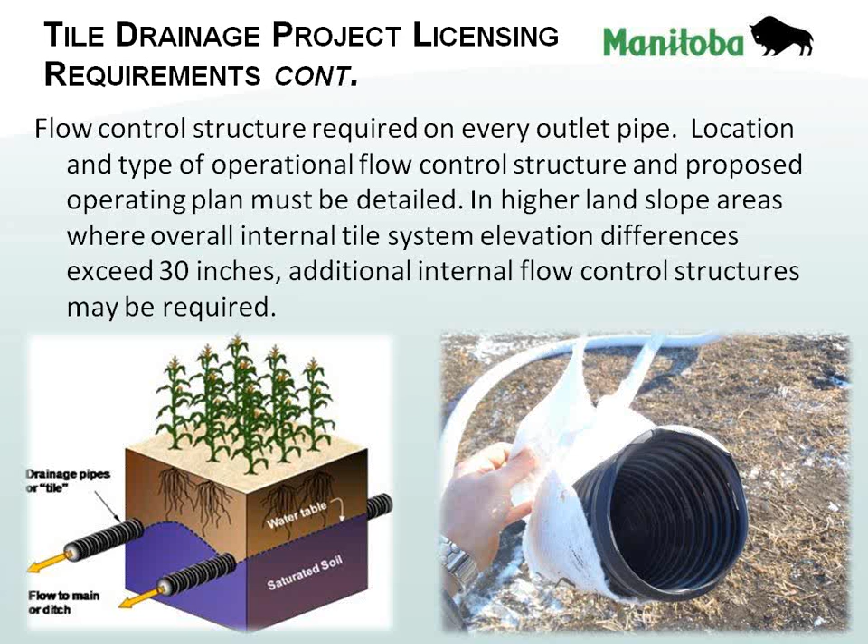All tile outlets are required to be rip-rapped and marked with a visible bollard, antenna, or other means to identify it, so that the affected municipalities, ourselves, or the conservation districts can find the outlets easily. Flow control structures are required on pipe outlets. The location and type of operational flow must be detailed in the license. In higher land slope areas where the overall system exceeds 30 inches, there may be additional flow structures required within the lateral pipes. We've seen lots of good examples of that through the last bunch of webinars.

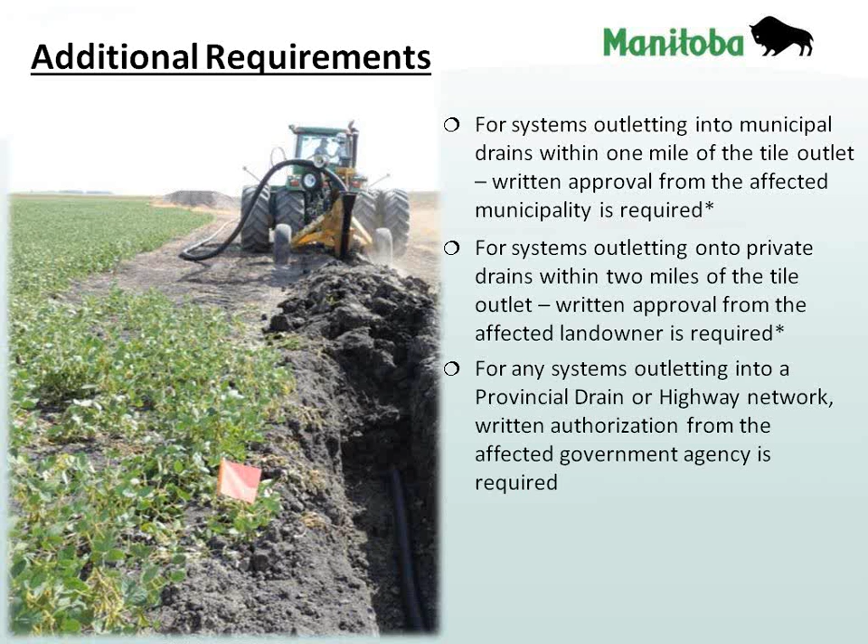Additional requirements for systems outletting into the municipal drain within 1 mile and that stays within the municipal drainage system: written approval from the affected municipality is required. The municipality may require additional information, which we would receive from them in their written approvals. If the municipal drainage system outlets or becomes a natural waterway within 2 miles of the proposed outlet, additional landowner sign-off may be required. If the system crosses natural drains or across private property, the landowner's written approval is required for a minimum of 2 miles downstream. For any system outletting into the provincial drain or highways network, written authorization from the affected government agency is required. All tile works must have a minimum 50-meter setback from any semi-permanent or permanent wetland.

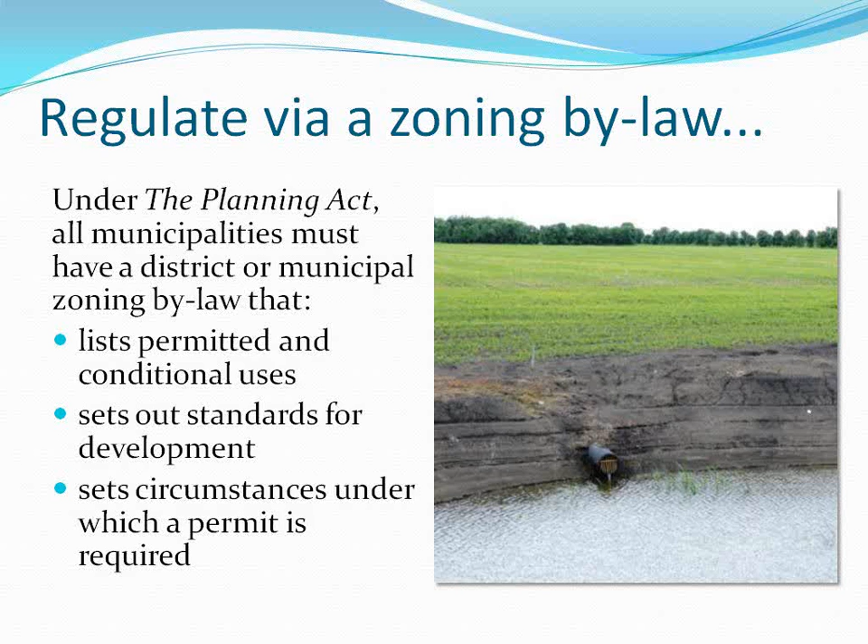So what you can do in the zoning bylaw, if you choose to regulate it as a permitted or conditional use—conditional use is a little different. Permitted, of course, just means this use is allowed in this particular zone.

Conditional use requires notification of all landowners within 100 meters of the property. If somebody comes in with a conditional use application, the municipality will set a hearing date, a public hearing. Anyone can come, they can speak for or against, ask questions, and the applicant can provide information and hopefully answers to those questions.

When the municipality hears the public hearing, they can set conditions on development, including development agreements, which can be financial in nature. Municipalities can ask for things like mowing, as in the RM of Dufferin, but there are other things they can ask for too, like cost sharing. The thing to note on a conditional use is that a council decision is final—there's no appeal. And it does involve a public hearing, so that may be something a municipality wants to consider if they decide to go this route.

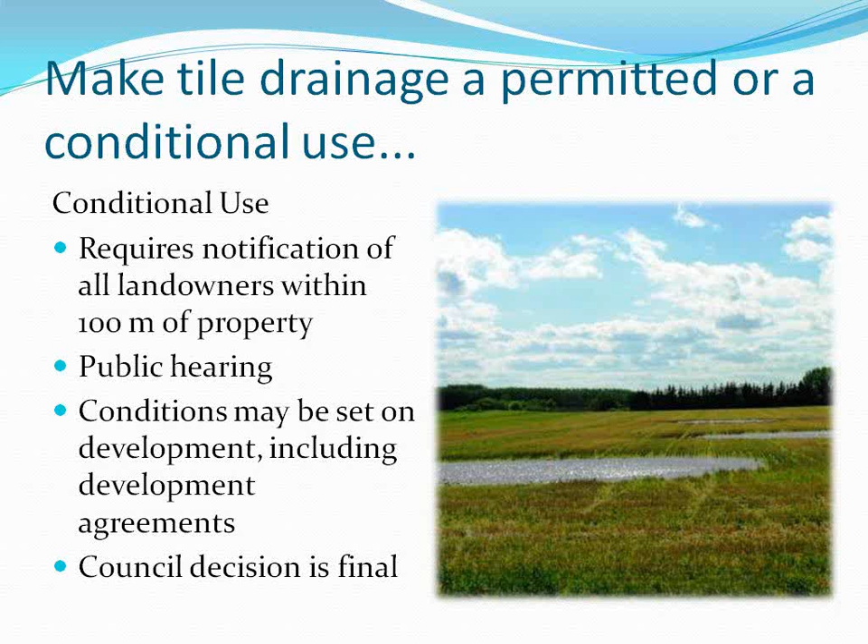Certainly what we've seen mostly so far has been the municipal bylaw. And again, municipalities can issue development permits.

Even if something is listed as a permitted use in a zoning bylaw, a municipality can require that a development permit be issued, so the council knows exactly what's going on. The reason they can do that is, again, development is defined under the Planning Act as the removal of soil or vegetation from land, the deposit or stockpiling of soil or material on land, and the excavation of land.

Most municipalities, of course, have building permits—every municipality has a building permit—but not all municipalities use development permits, and that is certainly something available to them.

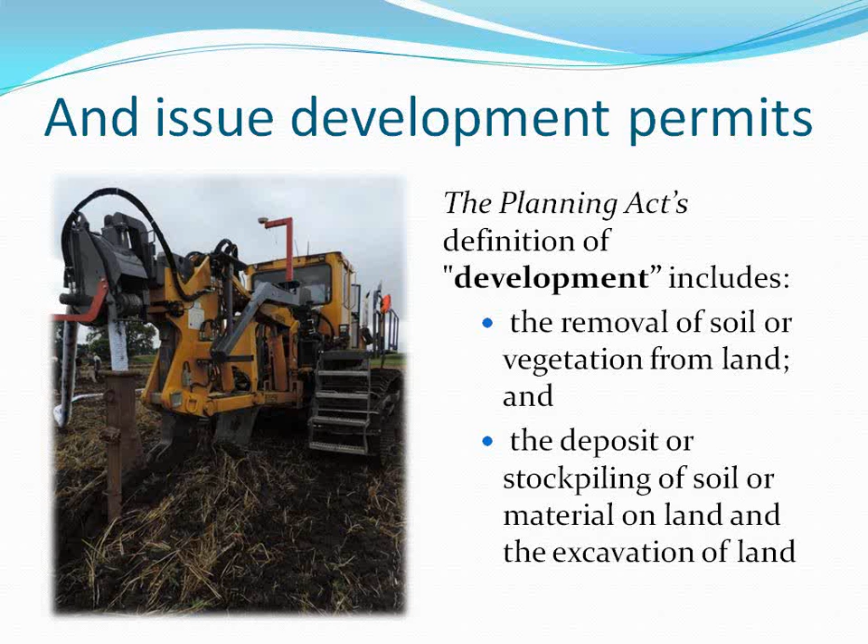Not to be paternalistic, but I just want to put something forward. Again, it's up to the municipality to determine how they want to get involved in regulating tile drainage in their particular municipality. But you should be aware that the province is responsible for regulating the environmental aspects of the development. As Jeanette just presented, there is certainly a regulatory component for which the province is responsible, and of which municipalities really should be aware.

The other thing I want to note is that municipal bylaws and regulations really need to focus on municipal issues, and I do think Dufferin has done that quite nicely. It should not be inconsistent with provincial regulations. So if you've got something in there, make sure you're not doing something inconsistent with the way the province has regulated. That's really important, and that comes with knowing exactly what the province is requiring.

The other thing I did want to mention, because I think this is so important, is that once a municipality adopts a bylaw, whether it's a zoning bylaw or a municipal bylaw, it is the municipality that's responsible for enforcing its own bylaws. That's another reason why it becomes important not to overstep whatever the province has put in terms of regulation. Just ensure that if you've adopted a bylaw, it is enforceable, whether that means consulting a lawyer or talking to the province. Both avenues are available to the municipality.

The reason I raise this is the RM of Portage La Prairie. This was in July 2015. They adopted, I'm not sure if through a bylaw or a resolution, approval of tile drainage on four separate applications, and in every case made it contingent on no manure being applied to the land afterwards.

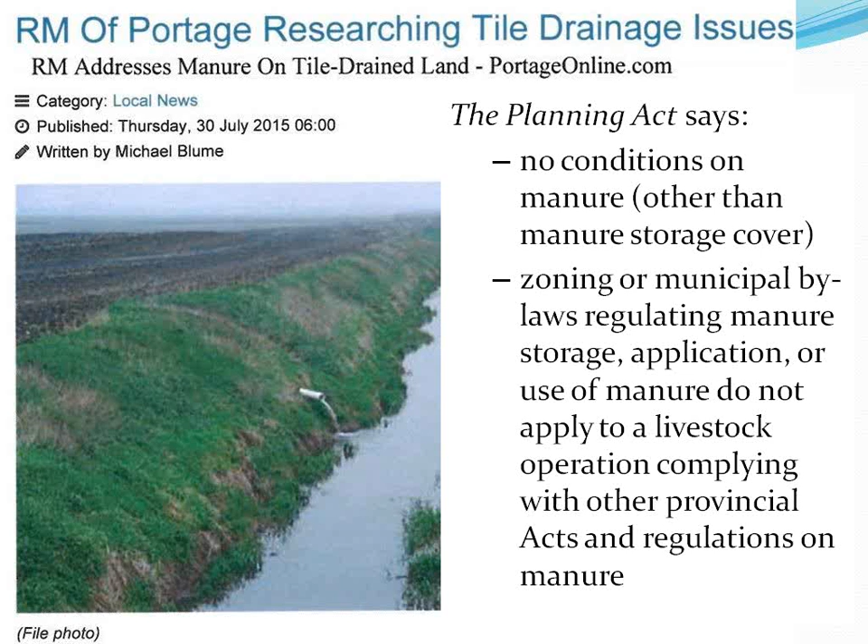This is not consistent with the Planning Act, which is pretty clear that municipalities should not be regulating manure application to land, since that's regulated by the province under the Livestock Manure and Mortality Management Regulation. So is this bylaw enforceable? If once the tile drains go in someone decides to put manure on the land, is that something they can actually act on? Probably not - it's probably not legally enforceable. That's something a municipality needs to be aware of. I'm not trying to take pot shots at the RM of Portage La Prairie, because this is actually what got the province's attention and led to the formation of the Interdepartmental Tile Drainage Working Group.

This is the working group that I'm involved in - Jeanette is on it, Mitchell is also involved. It includes representation from the Departments of Sustainable Development, Indigenous and Municipal Relations, and Agriculture. The goal of our tile drainage working group is to coordinate tile drainage initiatives, knowledge, and programming across departments so that we're all talking to each other and we all know what's going on in terms of the regulatory requirements.

That comes out of Sustainable Development. Indigenous Municipal Relations is the department that works predominantly with municipalities on planning. And of course Agriculture has a strong interest in tile drainage from a farming standpoint. So with all three departments at the table, and a few representatives from each in most cases, our goal is really to improve communication and coordination.

At this point we've really focused a lot on extension. Mitchell's been involved in a lot of different opportunities. We've really appreciated this opportunity to partner with the Red River Basin Commission on this webinar, because it meets our goals quite nicely, and hopefully theirs as well, and gets a really good discussion going on tile drainage and what that means in Manitoba.

So we did form this Tile Drainage Working Group. Our next big thing in terms of extension is a session at the Manitoba Planning Conference, where we're hoping to reach out to some municipalities. It's called 'The Ins and Outs of Tile Drainage: What Municipalities Need to Know.' It will be a very condensed version of what you've seen in the webinars, since we can't cover what's happened in the last four webinars in one hour, but we'll do our best.